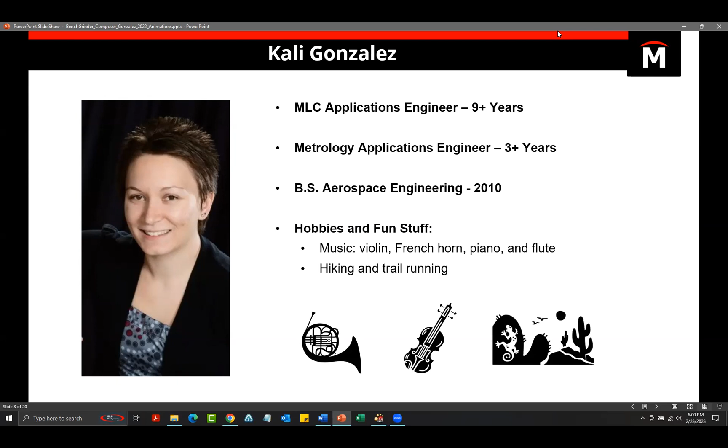So that's just a little bit about my background as far as how long I've been with MLC and some of my education.

What I really wanted to talk about today was a different portion of SolidWorks. When we think of SolidWorks, everyone here is a SolidWorks CAD user, and CAD is great - we all love CAD, there's so much information out there. But there's a gray area not often discussed nearly as much: SolidWorks as a company has an entire section dedicated to technical communication. This is a section I deal with quite frequently - I do a lot with SolidWorks Inspection, MBD, and a lot of this is to create documents and documentation. So is SolidWorks Composer, which is what I'm going to give an overview of today.

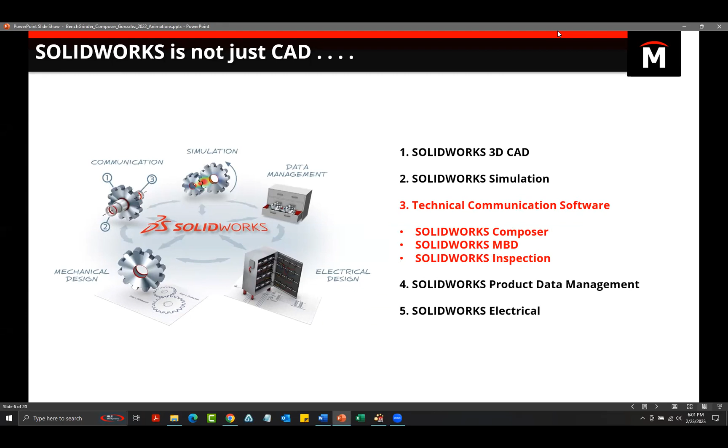If you've never heard of SolidWorks Composer, let's talk about what this product does. It takes a moment to wrap your head around, but instead of creating or editing models, we're actually just going to leverage 3D models in order to create graphical content that we can easily output and customize for things like technical documentation.

If you find yourself using the snipping tool, the print screen button, and cropping photos from your SolidWorks files for assembly instructions, repair instructions, product manuals, training guides, and tons of other stuff, then this could be very useful. Again, we're not creating any CAD files, we're simply leveraging it. And we're going to see a lot of automation towards the second half as well.

One thing I love about SolidWorks Composer is that animations inside of it are extremely simple to do - I think it actually blows SolidWorks out of the water as far as simplicity in doing animations. I'll show you in under 60 seconds how to get an animation started. You can also create interactive content for things like websites and product catalogs, and I'll show you an example of that as well.

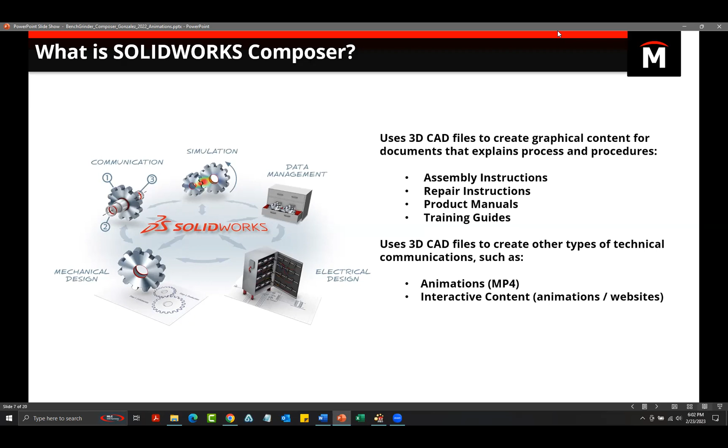I'm going to go through an example using this bench grinder CAD file, showing you the main sections we're going to cover. We're going to start with creating views in SolidWorks Composer. Views are like your fundamental building blocks in Composer - pretty much everything starts with a view. Once you have those done, you can start dragging things, and that's really how you get to any other portion, whether it's animations or interactive content.

We can add effects into those views - effects are things like arrows, lines, and different types of ballooning.

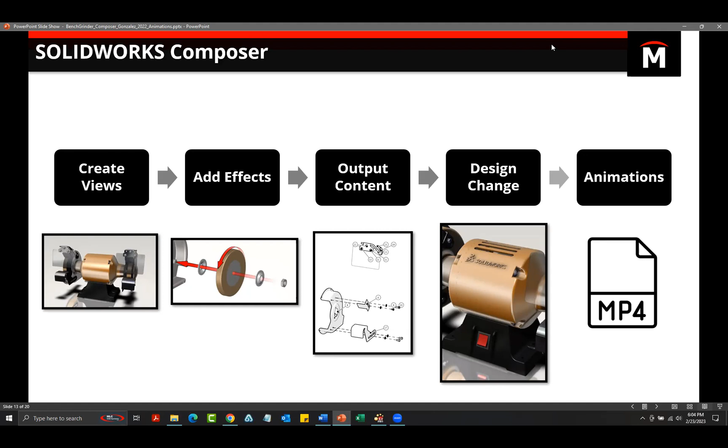There's so much you can do inside of Composer to really enhance these images. Just a heads up, those first two sections, creating views and adding effects, take the longest. Once you get to output content and design changes, it's going to start moving along really quickly. So it feels slow at the beginning, but then we're going to go through this whole scenario.

Let's go into Composer and talk a little bit about our project. We're going to create some base views here. Composer is actually a standalone product, not inside of SolidWorks, it's its own product. But what I have open here is just a SolidWorks file, and I have a couple of views that I already created to give us a good starting point.

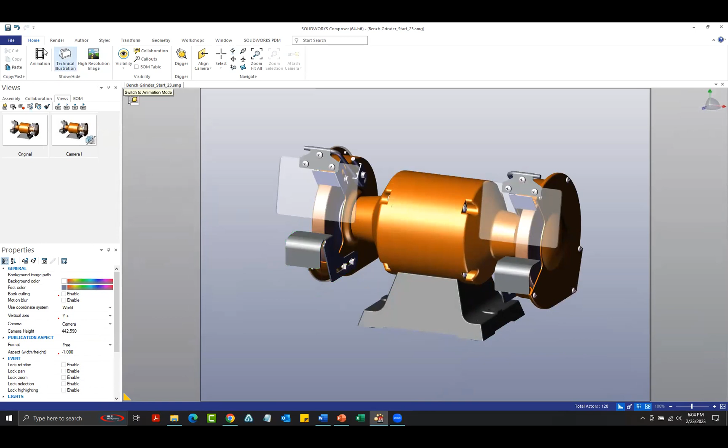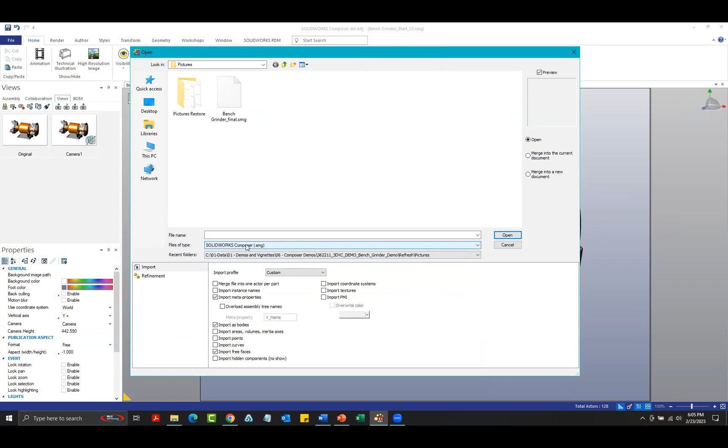To show you how many different file types we can open inside Composer, I'll show you the list here. Not only can you open native SolidWorks parts and assemblies, there's also Pro E, Inventor, Step, IGES, Parasolid files. I like to use SolidWorks Composer specific files, .smg. SolidWorks can export those at any time, any version, just file save as .smg. It makes your performance in Composer extremely quick by comparison. SolidWorks already has the ability to export to this file type, so that's really just what I brought in here.

As far as the views, I have my original view and this camera view. I'm going to create 6 additional views with you. To do that, I'll show you this Microsoft Word document. It's like a skeleton document, not a lot in here. Maybe I'm starting this from the beginning, and this is going to be my operator's guide.

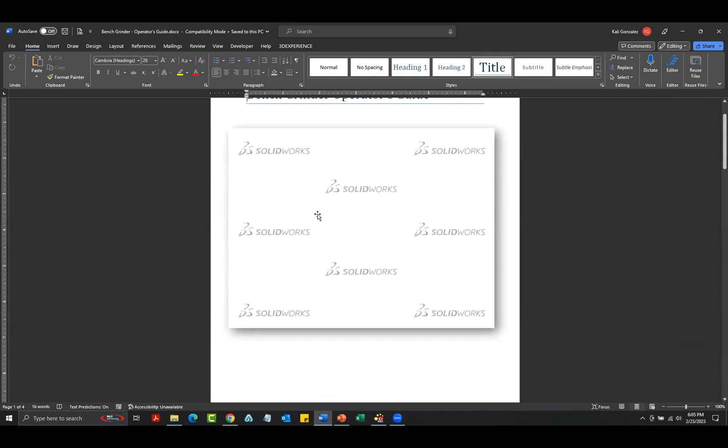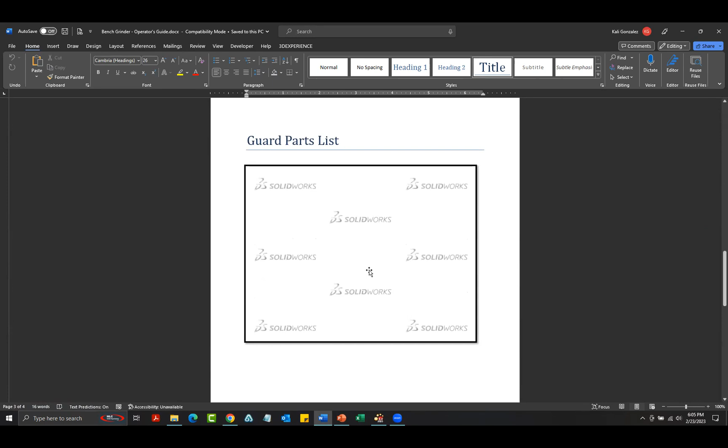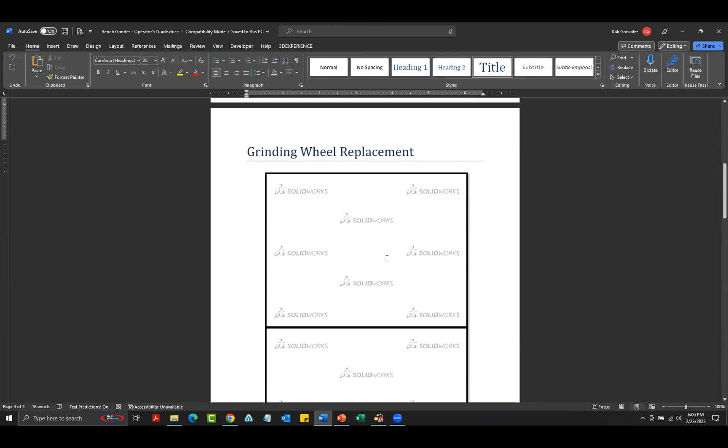So I have a couple of placeholders in here, just placeholder pictures. I'm going to do a cover photo, talk about grinding wheel replacement with 2 photos or graphics in there. We'll talk about how Composer handles unique parts lists. Then I'm going to do a motor detail view and an operator caution. So we're going to go ahead and get some of those basic views created - those are the 6 views we're going to start with.

One thing I really like about using SolidWorks Composer is once we already have the file inserted, we're already leveraging CAD, and we're inside this really easy 3D environment, which as SolidWorks users we're already very accustomed to. So I'm going to go ahead and create a new view - that's going to be view 1. In my mind, I know I'm going to plan ahead for this to be that cover photo.

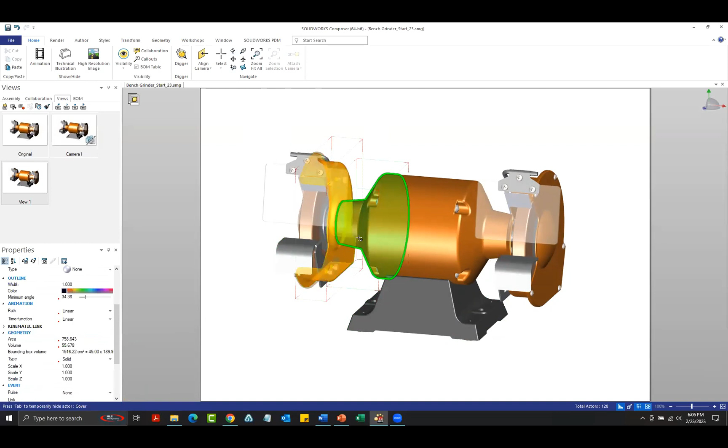Composer is not what we consider a photorealistic rendering tool, but it does have a ton of options available to us as far as customizing appearances to make them look a little bit more realistic. Again, if you're looking for photorealistic rendering, that's going to be something like SolidWorks Visualize or Keyshot. But we can add different colors into this, you can even add different types of what we call environmental effects.

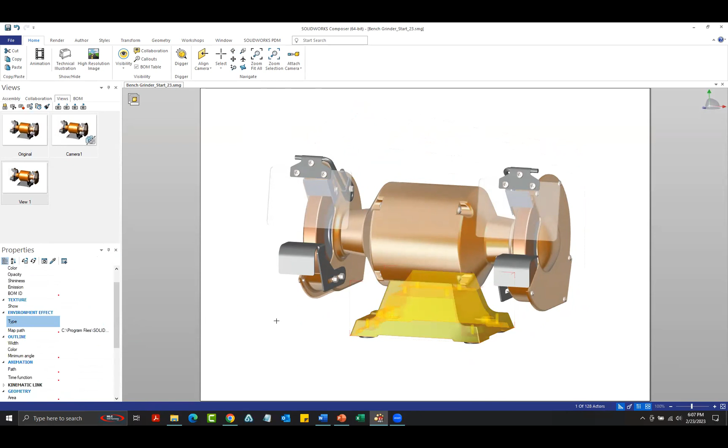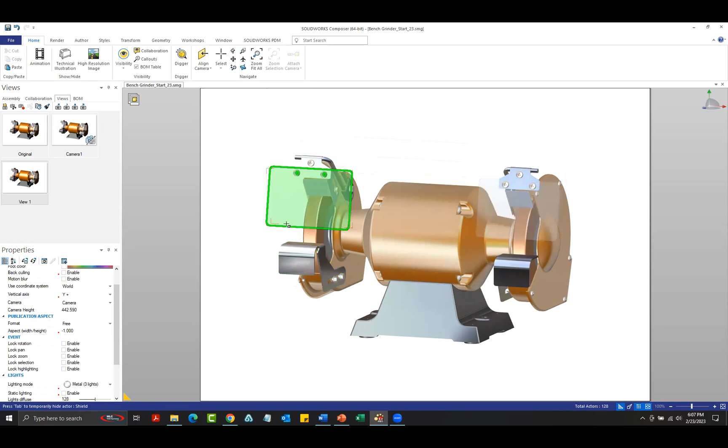So my cover photo here is just going to have a little bit more of a realistic appearance, so I'm adding some of these appearances in. As you can see, I can still click on all of these different items. One thing I want to stress is I'm only working with graphical content, not actually working with the entire CAD model as far as what's loaded in the background. So even with very large, massive assemblies, the performance is going to be very good in Composer, partially due to the fact that we're only working in graphical content.

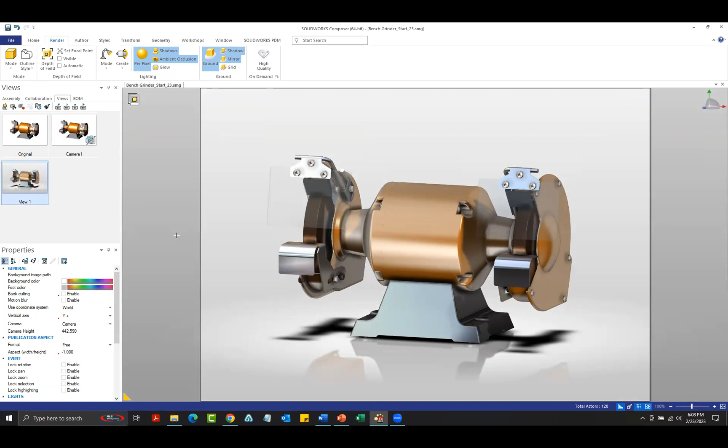So again, I'm just working on making this a little bit more realistic looking, adding a couple different settings for lighting, ambient occlusion. You can even change the background if you want it to be slightly different. What's great is once I'm done, I can update that view and it saves it for me. The more views you have, the more you can leverage. So here I can go back to my original view - notice that goes back to all of those initial settings. Let's make this again a little bit brighter.

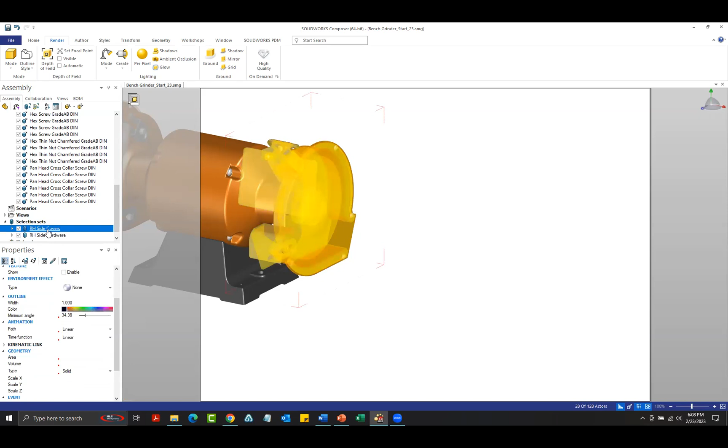Because we're leveraging CAD files, one thing we actually have at our disposal is our entire assembly tree. You can utilize the assembly tree as it is, but Composer also lets you take different items of the CAD file and put them into something called selection sets. This allows us to actually start moving items around, even though we're working in this graphical content. What's also really nice to know is that everything we're doing right now does not go back into the CAD model.

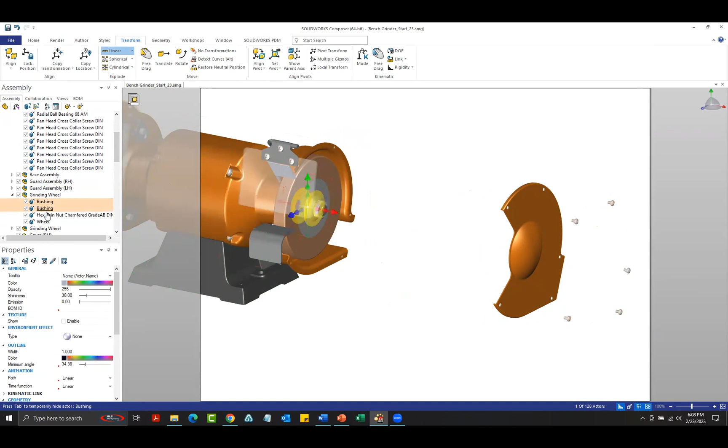So what that means for us is that we have full ability here to explode, make changes, do really whatever we need to do in order to create some of these images and content for our document. We don't have to worry about affecting the model, the design, or any design intent. Everything stays inside of this composer file.

One other thing we'll do here is make one change to the settings. Maybe I want a couple of these items to have a little different appearance, so we can customize this to show those particular edges. This is going to be the basis for my next two views, so I'll save those. Now for my fourth view, that's going to be that guards parts list.

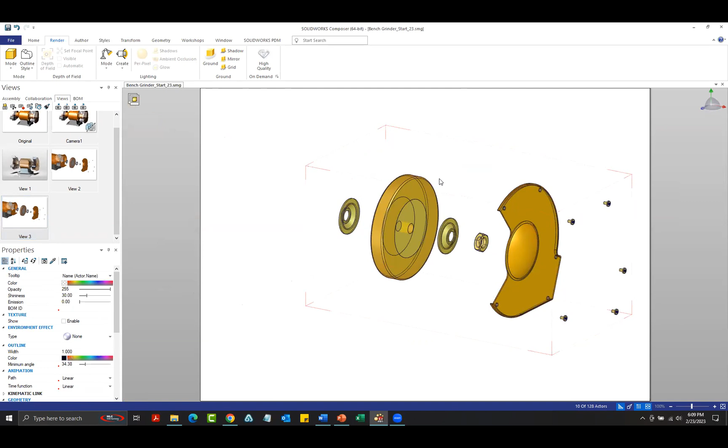Composer has a huge assortment of selection tools, such as showing the selection or hiding other things. SolidWorks has items similar to this, but Composer takes it to the next level for things like this. Let's go ahead and make this silhouette. Again, we're just getting the basis for our views here.

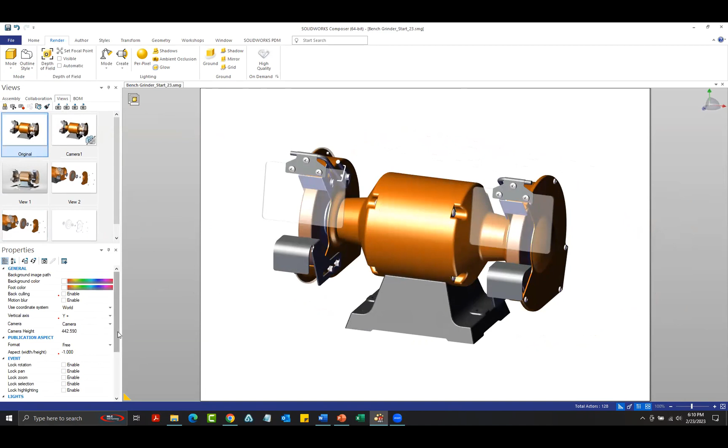I'll go back to the original and make sure my lighting is a little brighter. I could save the original, maybe do that there, and then save this as view 5 and view 6. Not too bad there — we're able to create views very, very quickly. We are in this familiar 3D environment, and we can still show how items come apart, go together, and start reusing CAD data from the very beginning.

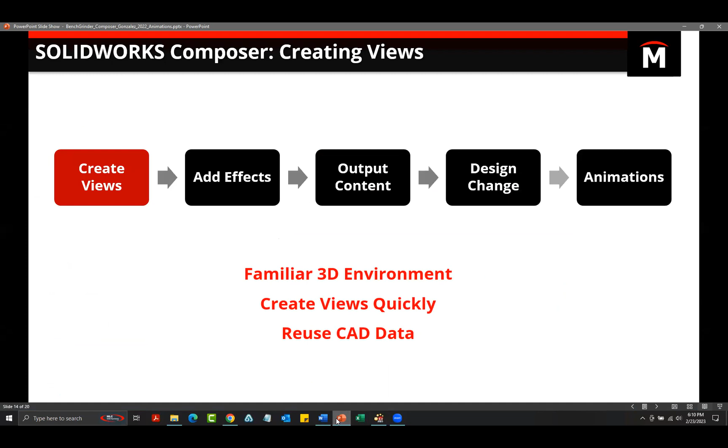Now, the next thing we want to do is add special effects into these images to add clarity, knowing we're going to export these to go into a document.

So if I go back into view 2, you can double click on any of these views to navigate through the project. I'm going to choose these pieces of hardware, go to my author tab, and maybe add a couple of paths into this.

Inside of Composer, everything, even these extra items we've added, are things you can actually grab. You can select them all, and again you can customize it. Everything is customizable. And what's really nice is if you want a very standardized method of documenting, you can save this as a style. I clicked out in space there.

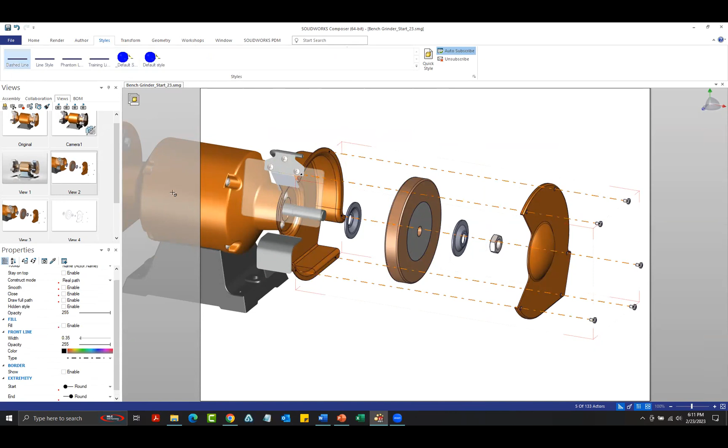Let me go ahead and select those. Styles are just little files that contain specific information and settings. That means you can store it on a network, everybody can access it, and I can subscribe to it whenever I want to make sure those files are saved and that I have those effects added.

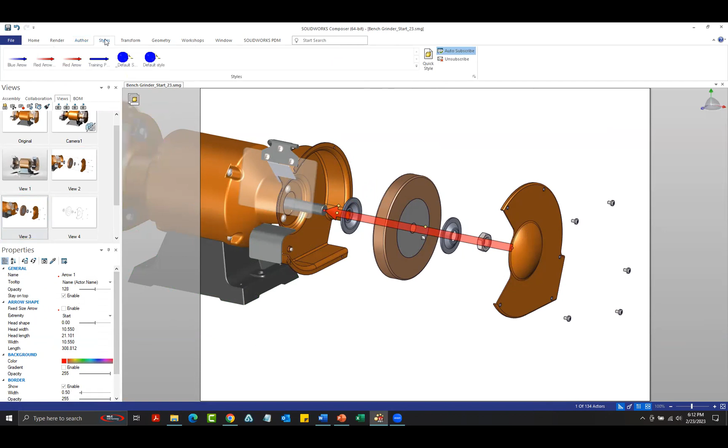We can also add in different types of content. There are different types of arrows we can add as well. Something to keep in mind is we're working with graphical data, but notice how I can still snap to cylindrical items — there's enough intelligence built in to really allow us to easily customize some of these items.

And again, styles — if you use the same type of arrow style all the time, no reason to sit there and try to make it the same. You can just click on what those settings are going to be. We have different types of arrows, and we can even add things such as circular, knowing this is going to potentially spin. If we have this in a style, we can utilize that as well.

And it looks like it was actually behind that. I'll create a second one there. You can always hide anything, but I'm going to create another one and move it over so we can actually see it.

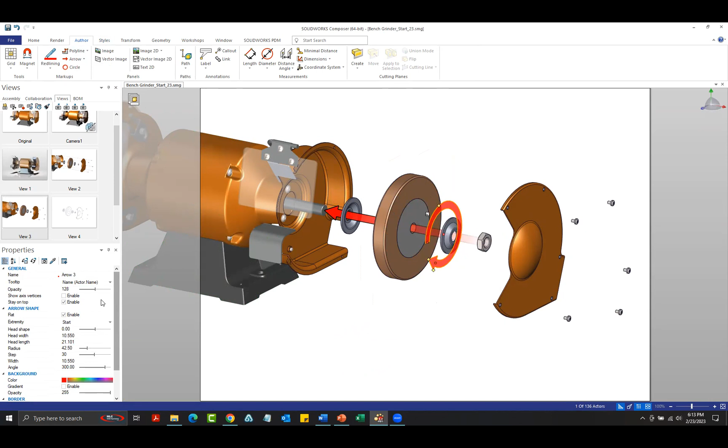And from here, we'll go ahead and change that. You can transform, translate, move items around, even if they are something you've added into the project. We can make these larger, again customizing any of these nodes. This is something we can easily set up. Once created, again, we'll save that view.

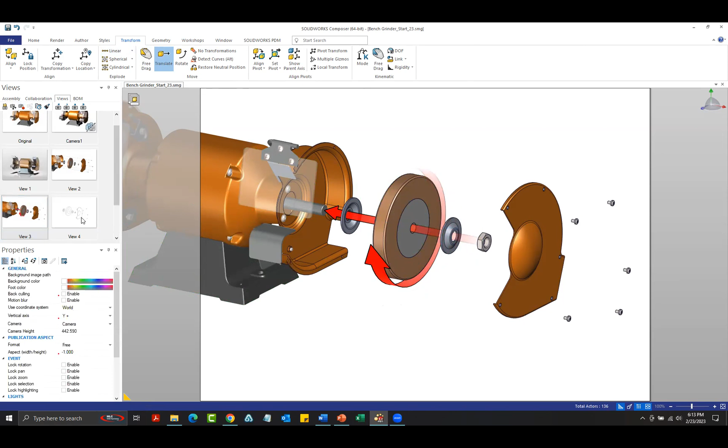Inside of Composer, if we want to do a type of parts list, we can certainly do that. For example, perhaps we're planning on putting this in a document or on a website, and we would want to have a specific parts list just for these items.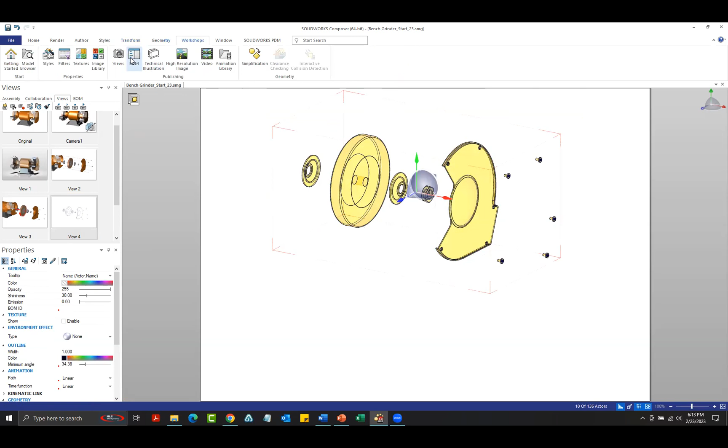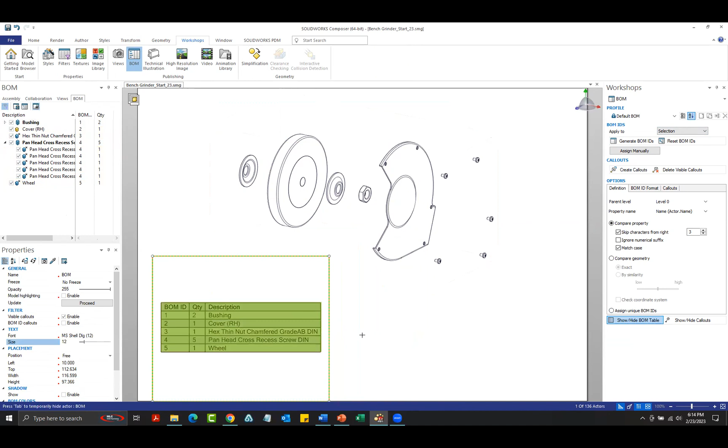I can actually go into workshops where we can choose how to publish specific data. And in here is where you can assign BOM IDs, hide or show the bill of materials table. These can be unique to any specific view, or you can choose to bring in metadata such as SolidWorks custom properties into this as well.

And we can show or hide some of our callouts. Again, these get sorted, but we can move these around as needed.

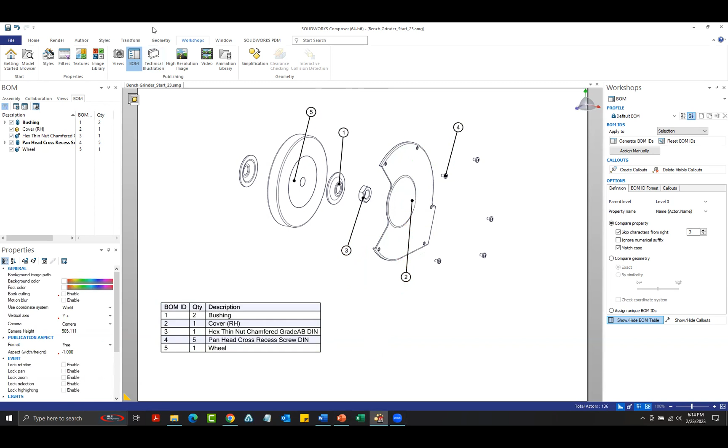Once done, just make sure you save that view.

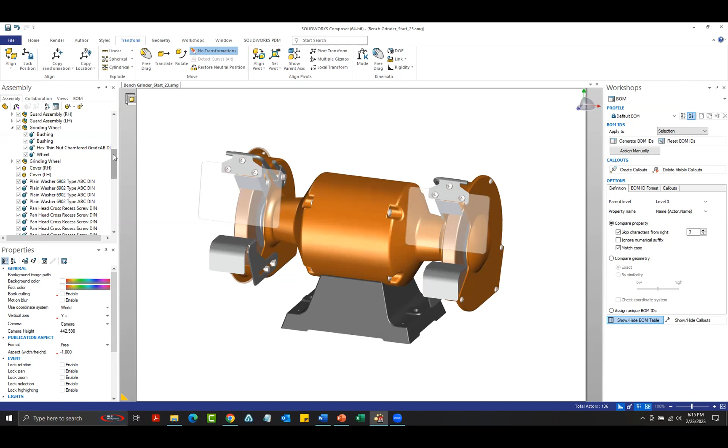Just a couple more items we're going to add in here. One is a detail view. What's really nice about Composer is all the different types of selections, so we can easily hide or show different items. One easy way to hide everything is to turn it completely off in the design tree, then turn on the specific items you want to see.

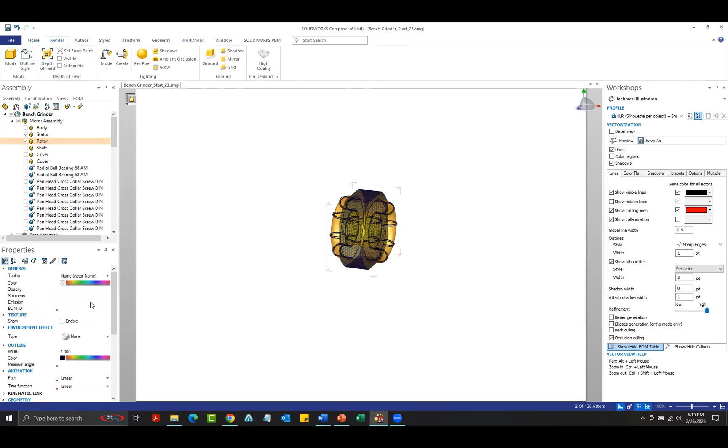We can actually create high quality detailed views of these components. Before I do that, I'm going to change the rendering style, so that my detail view has very crisp edges.

If I click on my detail view, this allows me to specify what this view is going to look like. I can set this up as needed, maybe choose the color regions as well, and I'll just say create.

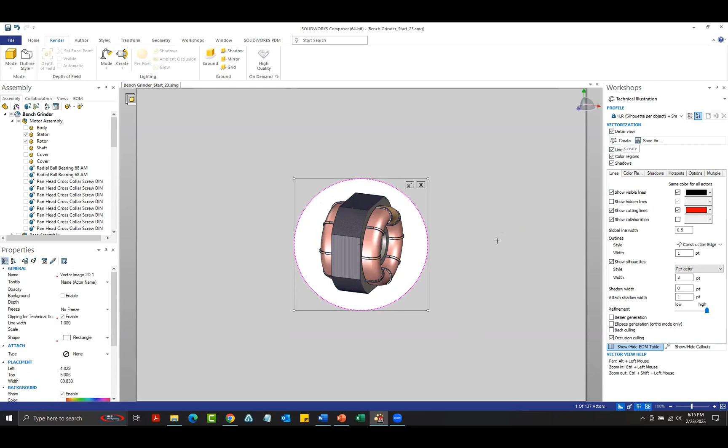Going through the technical illustration workshop like we just did creates items that are vector graphics, which means they scale really nicely. Even with a 4K or 8K monitor, it doesn't matter much - it's going to be very high quality. And then we can simply show all the geometry.

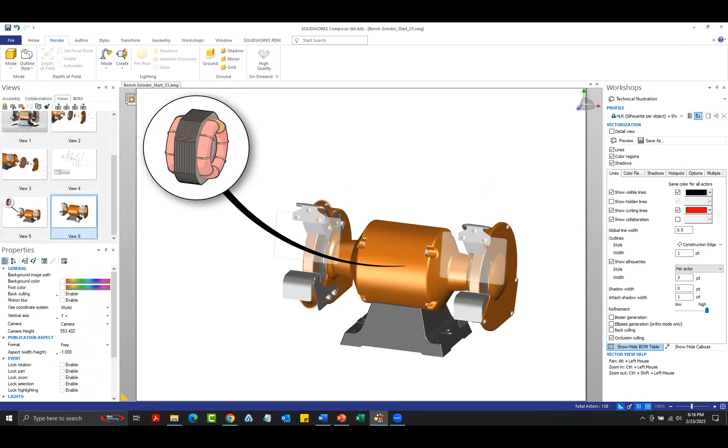So we can easily create this information to call out. And then for our final view, this is where we're going to have that operating caution.

So perhaps you have a specific library of photos that your company already uses for stuff like this. You can just pull that into Composer and drag and drop it in, so you can leverage existing information that you have.

We can add static text into here as well. This is like a glorified text box - that's really kind of all it is.

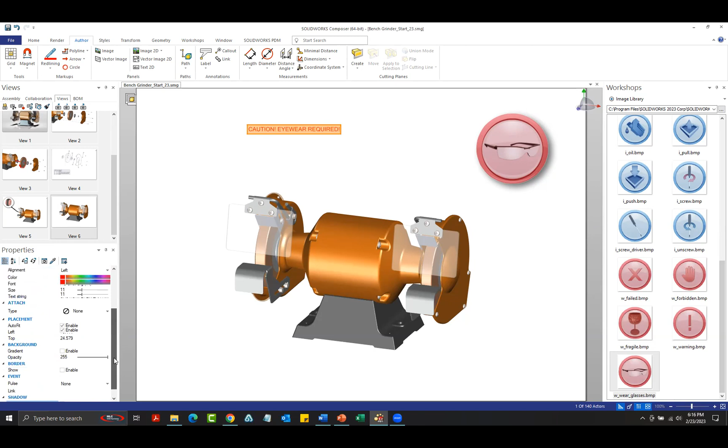We can go through and specify how this is going to look, and maybe even increase the size of the font. And then we'll save this.

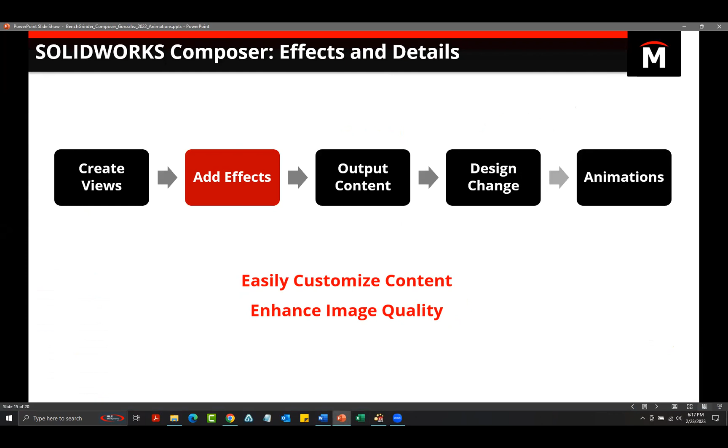So again, a quick overview of adding some of these specific effects into these images, so we can easily customize the content. You can save things as styles and use them over and over. The idea here is to enhance image quality, so you essentially have a lot less verbiage that you have to write down, or something to supplement that verbiage. All that work we just did was so that we can now output the content back to this Word document.

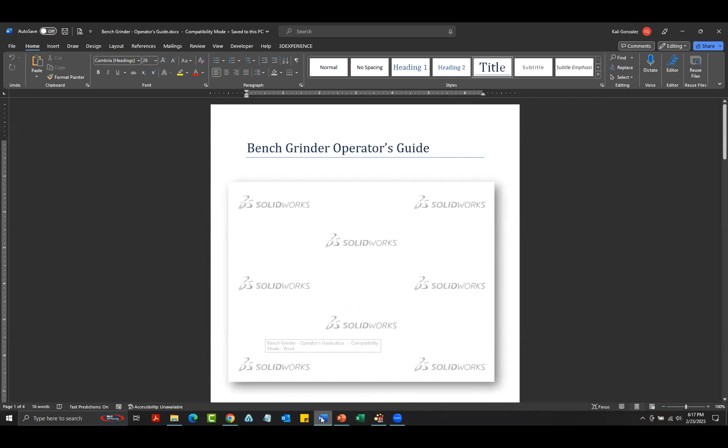So this is where Composer, I think, starts really showing some of the automation. If I go under my workshops, I can export this as a high resolution image.

Inside of Composer, there's an option to save multiple views. Basically, Composer is going to take all those views we just created and output them at one time, so you don't have to sit there and go file, save as, file, save as, or copy, paste, copy, paste. So let's go ahead and save those.

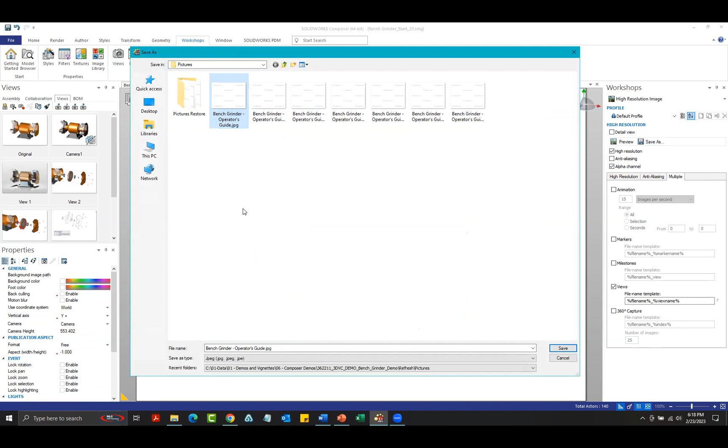These are where my placeholder pictures are, and I'm just going to rename what those are called, and I'm going to click save.

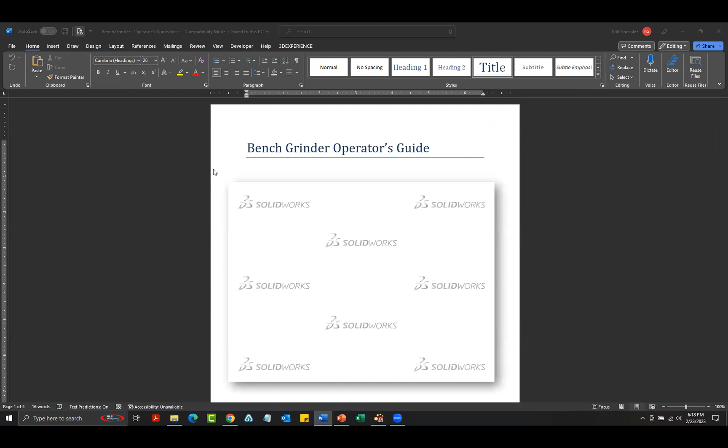So it actually just got done with those items. Let's go in here - I do have these items linked, so all I would have to do at this point is update my links, and almost all those pictures are there.

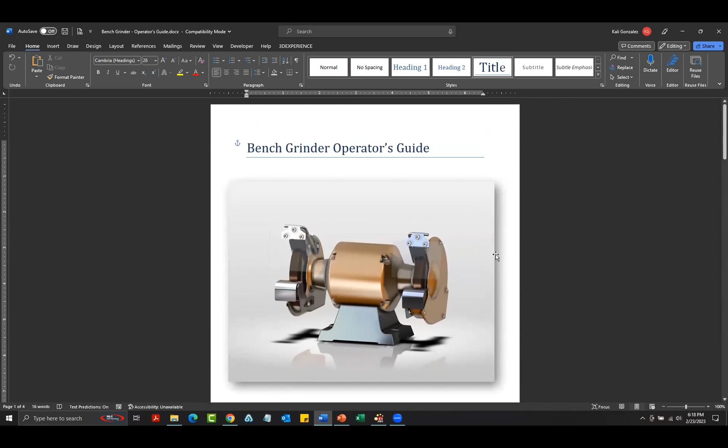This is going to maintain all your formatting in Word and Adobe Illustrator, whatever you're using. Almost every type of word processing document has this type of functionality, but everything is there. And if we wanted to change the size, we could do so. This is one significant way to output content for this type of documentation.

There's another way that Composer can output a document, and we've seen a preview of this in the technical illustration. But another thing we can do is, instead of saving this as a detailed view inside of this project, I can just do a save as, and this will actually save it as scalable vector graphics.

And if I go into my directory, this is just going to open inside of a web browser, and this is going to give me my color coding. This is built into Composer - there's nothing extra you have to do to get this color coding. I didn't set anything up, there's nothing involved in this. It's just built-in functionality.

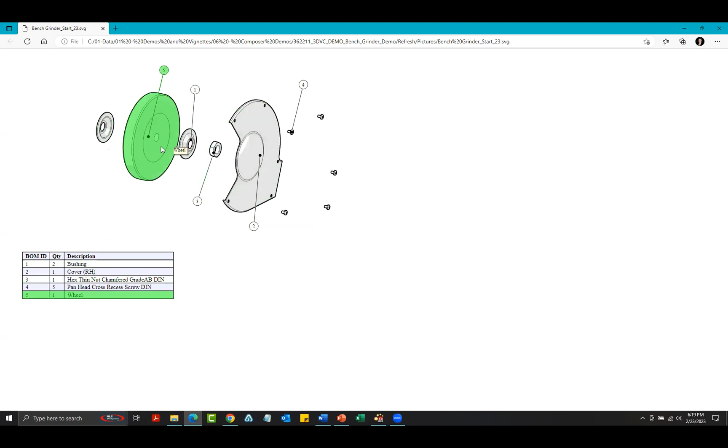So you can already see that this is your very first step in getting information from a CAD file directly onto a web page. I'll have a more extensive example at the end, which is on our website. But again, it's really just that easy, and you can share these files inside your company - they're extremely small, just open up in a web browser.

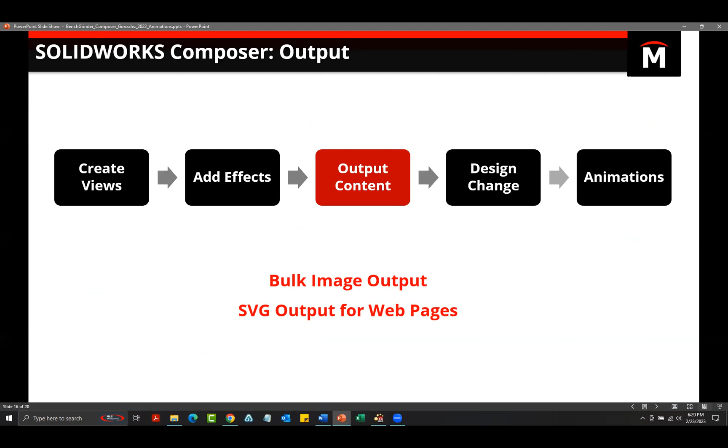Those are the two main items I'm going to cover. There are additional ways to publish items directly to PDFs or PowerPoint, but those two are going to relate directly to the documents we're working on. But we saw that bulk image output and how we can save those SVGs for the website.

So the next thing would be, well, that's nice, but my engineer just came back with all these changes, now what do I do? Do I have to start this whole thing over? No. And again, this is where I think Composer does a pretty fantastic job. Composer actually has its own ability to update information.

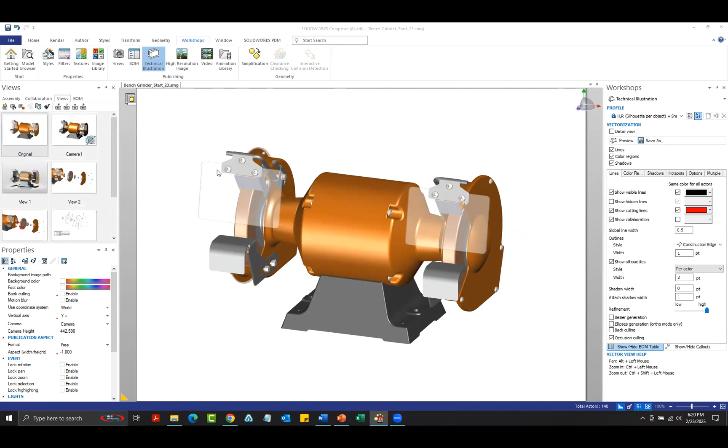So in here, you can choose a specific set of files. Again, if you're using SolidWorks, you can bring in native SolidWorks parts and assemblies. I'm going to bring in an existing SMG file, which would have some of that information already updated. You just want to make sure your import settings are the same as when you imported the file to begin with. That's going to help streamline this.

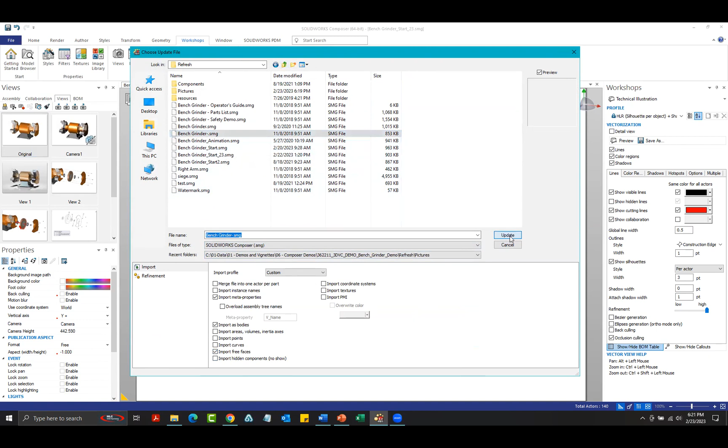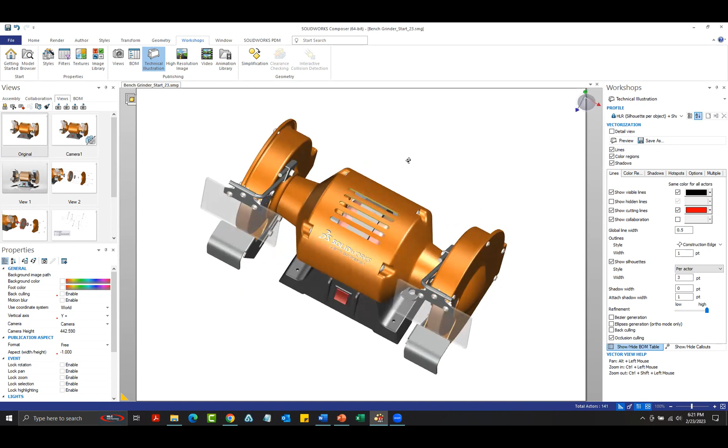So here, if I go ahead and look at the original, you can see it added some additional geometry at the top, like these vents, a logo, and a button switch there. But what's great about this is every single view has already been updated. I don't have to redo any of this. Everything is already there.

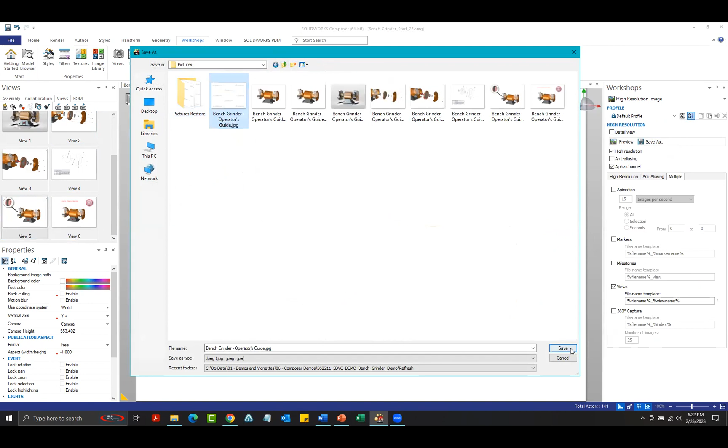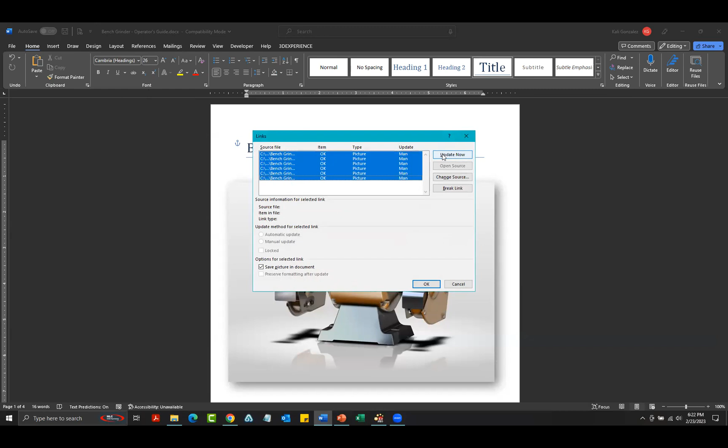So from here, what we'd want to do is just re-output those images, which we now know is not a big deal, knowing we can output them all at the same time. I'm just going to overwrite those pictures that are there, let the system go through and output those items, and then back into my document we can update these. Only the pictures as applicable, and even here on the side, it's already been updated. So the update is actually going to be pretty robust inside Composer.

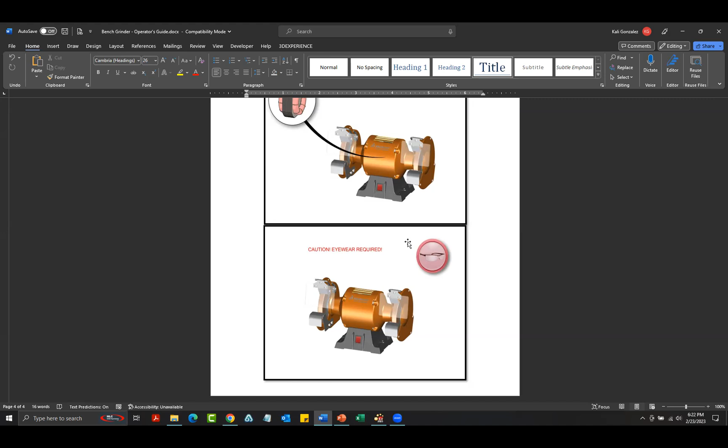Of course, like anything, there are a couple of snafus. If something has been deleted, it'll be removed. If something is added, you may have to add it to a bill of materials. But comparing what you just saw, even with some additional effort having to do a bunch of screenshots and cropping stuff in Paint -- Microsoft Paint is still one of the most widely used applications in Windows -- this will actually really speed that process up.

So design changes can occur very, very quickly. And the idea here is that you don't have to start things over all the time, and you don't have to rework everything every time there's a little tiny change in the model.

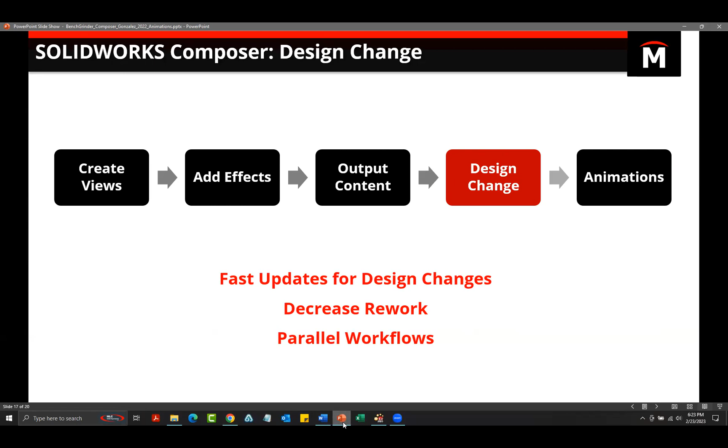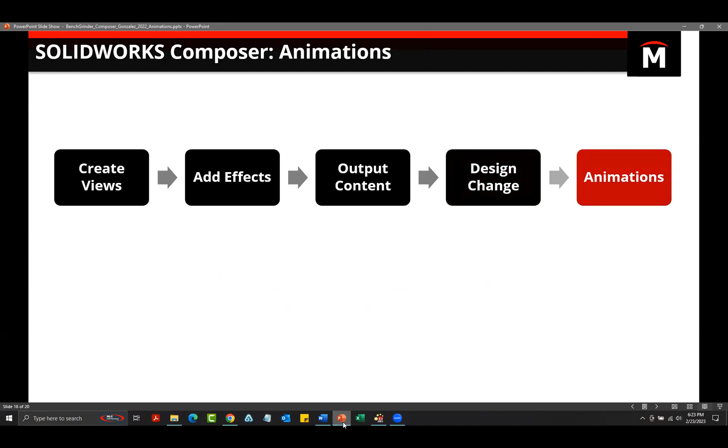So with that, I'm going to talk a little bit about animations. We're not going to do a full animation, but I'm going to show you an easy way to start animations inside Composer. Then I'll show you one that my team and I have worked on over the course of time.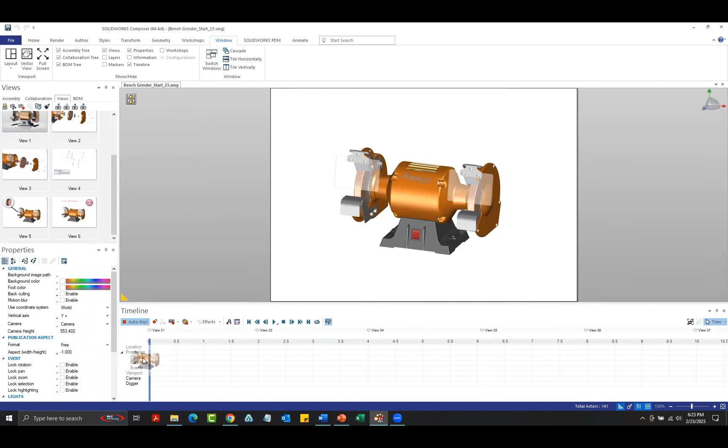So inside of Composer, and I think my tab -- oh there it is, my tab is somewhat hidden there. I'm going to go and turn on my timeline. This puts Composer into this animation mode, and you can just start dragging your views in. This is why I said once you have your views, they're going to be like your fundamental building blocks. And then from here, we can start dragging these in.

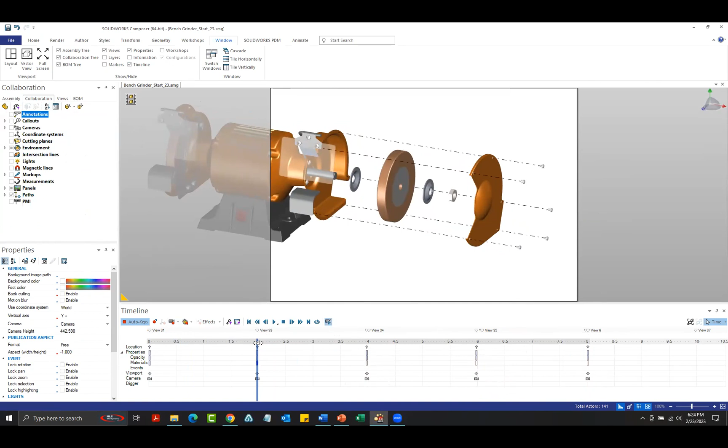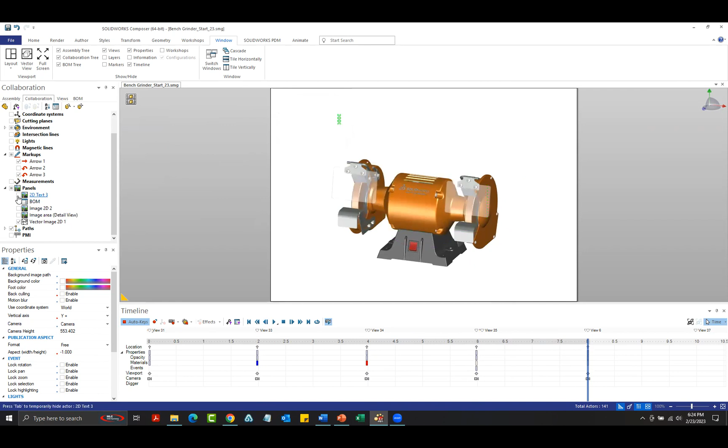Now, if I take a look, notice that my lines aren't showing. A lot of this I have set to not necessarily be visible depending on what I'm doing. But here, everything is under this collaboration tab -- all of my arrows, all that information, if I wanted to have some of my pictures, such as that vector image show up, and then maybe my 2D text and my 2D image there.

Usually what I then do, once I've added some information in -- this is kind of a little tip for you -- is just redo the original. And actually my bar should have been over there.

This kind of resets those at the beginning, and I have a basic animation with all the motion. A lot of my content is already in there. Again, we'd have to go through and take care of some of the timing as far as when things show.

But it's as easy as that to get started. One of the reasons it's easy is we're working with graphical content, so the concept of mates doesn't exist. When you work in animations in SolidWorks, phenomenal if you're doing motion analysis where you need your forces, stresses, and all of that. You just need pretty pictures, you don't need to worry about the mates. Makes it a lot easier.